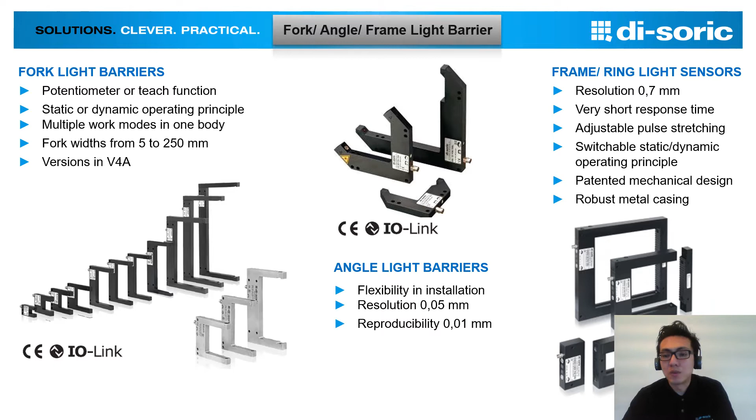An introduction on the sensor itself - we mentioned that one side is the emitter and the other side is the receiver. There is actually an arrow indication where you can see where the light path, the source, is coming from. Any target that comes between the fork will be able to trigger.

As mentioned, 050 will mean that this fork has a fork width opening of 50 mm, whereas if 070, we will have a fork width of 70 mm, and so on and so forth.

So for all these products, it's actually IO-Link capable as indicated. Each sensor comes in 4 different sensing modes, where the original factory default will be the standard mode, and then via IO-Link we can change it to high speed, high power, and also high resolution depending on your customer requirement.

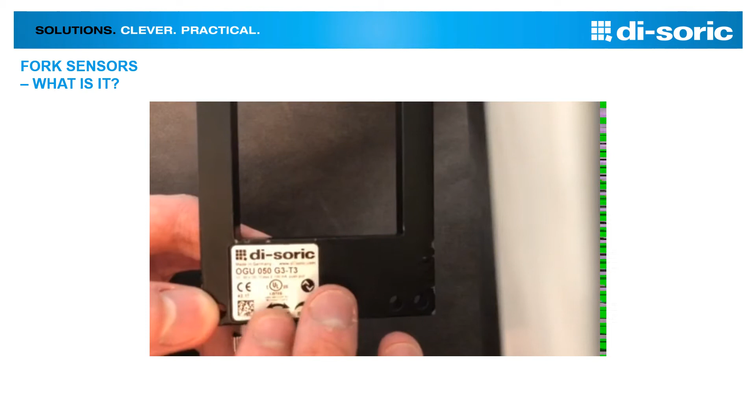So in the Asia context, where currently IO-Link is not very popular yet, this is the second generation of the fork sensor. Similarly with the first generation, the default potentiometer adjustment is still available, where you can change the setting using a screwdriver to either get NO, NC, and even the sensitivity adjustment.

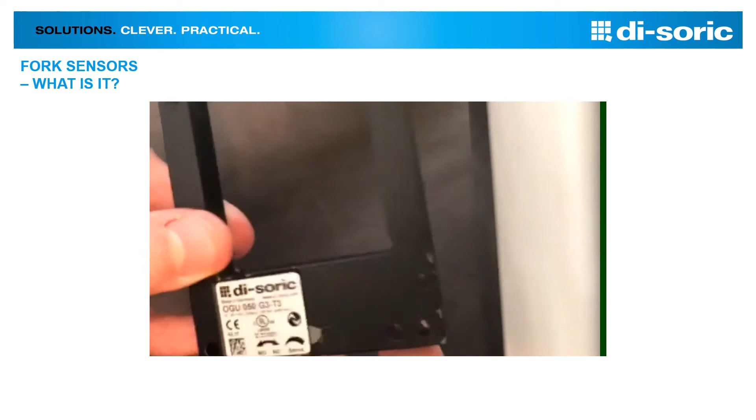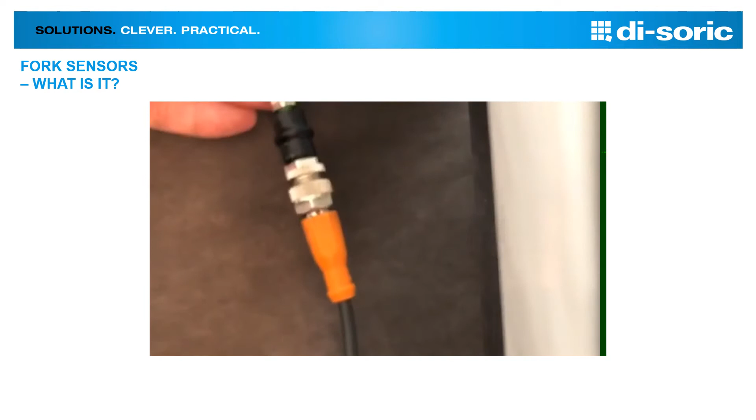So everything is integrated on the sensor itself. No alignment issue and no other additional wiring - just one particular cable, one singular housing, easy to apply, easy to operate.

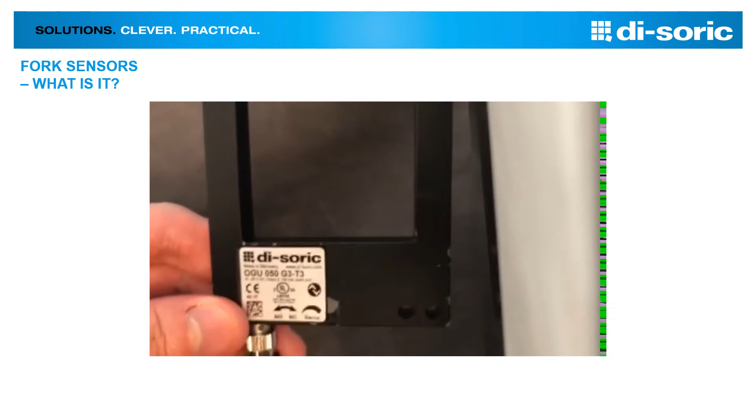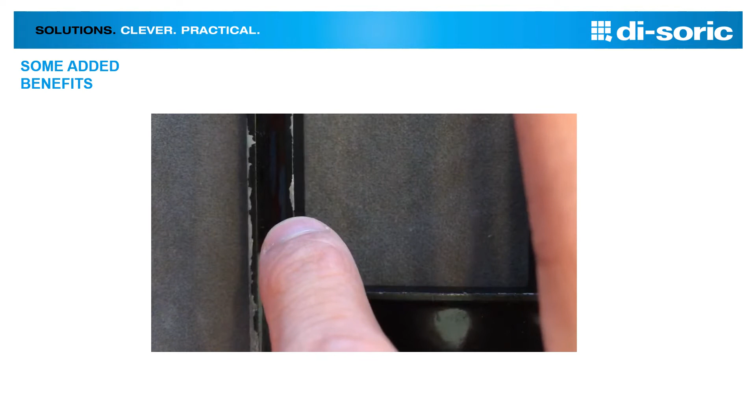An additional advantage of this sensor is, unlike other brands where the cover of the sensor is just a typical cover with gaps, in demanding environments there is intrusion of water vapor particles, and the sensor will die a lot quicker.

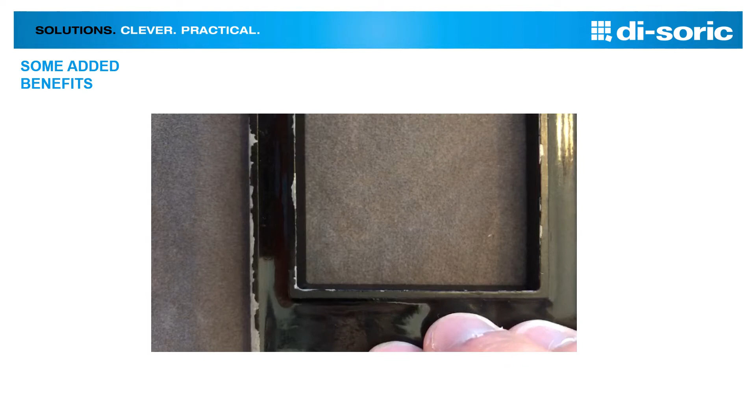In the di-soric case, you can actually see that our fork sensor is fully encapsulated, meaning you will not be able to find any gaps whereby any foreign particle is able to enter the sensor itself.

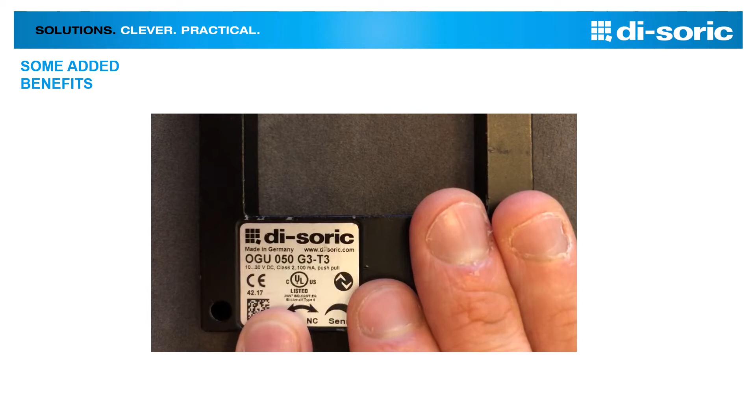With this design in place, the sensor has a very long lifespan, very reliable, very robust, which is why di-soric is confident enough to give a 5-year warranty for the fork and the Angle series.

In harsh and demanding working environments, where there might be a lot of sawdust or other dust particles, your regular photoelectric sensor will require a lot of cleaning. The fork sensor can come in a high-powered model, coupled with infrared optical lighting. With this configuration, the sensor is able to function with very high performance capability. Cleaning is brought to a minimum because of the penetrating power of the IR light itself, along with the sensor working under a high performance configuration.

Other special requirement applications might include high-speed monitoring, which the OGU 010 is able to reach, with a max speed of 14,000 Hz switching frequency. This speed is very fast compared to other products in the market. 14,000 Hertz is a very high value which is almost unmatched.

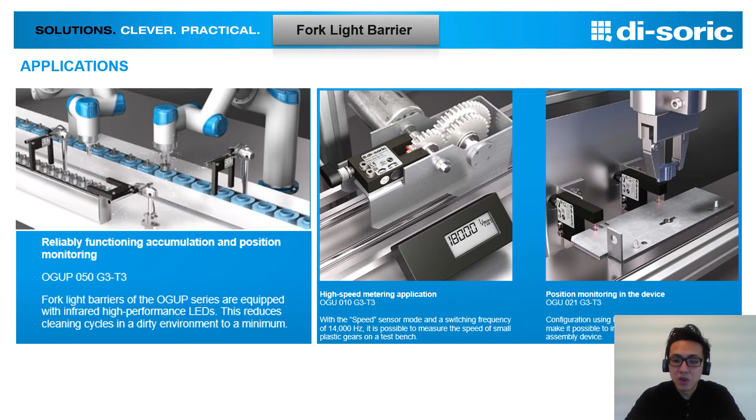In such requirements, we definitely have the right sensor for the job, and it's up to us to bring this knowledge to the customer themselves. Very high switching frequency, very high switching accuracy also. Depending on the requirement of the application, one singular model of the sensor can be configured differently, and used to address different situations and different working requirements.

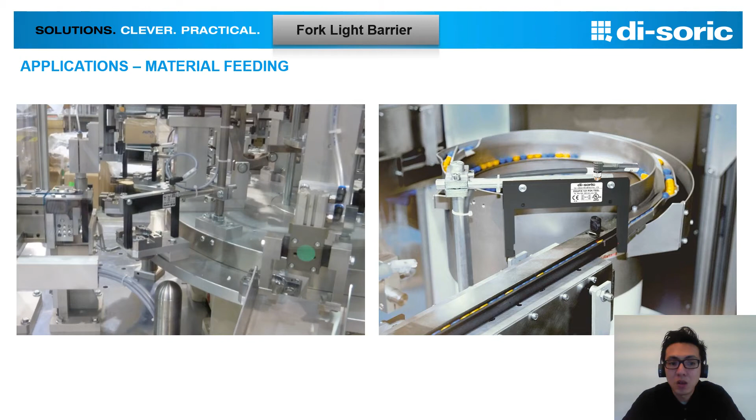Here you can see actual real installation of the fork sensor, showing in normal circumstances how it is being installed, how it's being mounted to the machine itself, and how the detection is carried out. In this case, we see a material feeding system whereby the fork sensor is set up in line with the material path to pick up the presence of material.

So what it can do is also perform the location of specific parts, depending on how you would mount the sensor.

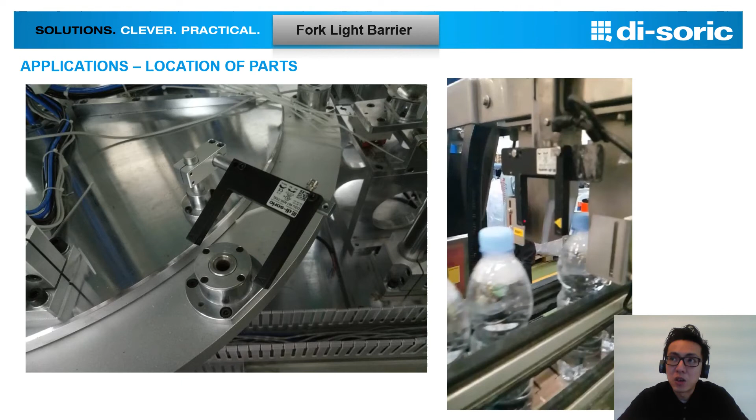Under such high speed, you can also see that the switching itself is very accurate. The fork sensor is definitely a very capable product, easy to understand, easy to install. Just that in the Asia context, most customers are used to using fiber optics for these applications, or just regular photoelectric sensors. However, the fork sensor does have a lot of advantages that I believe, once we introduce this product to the customer, might actually be very interesting and beneficial for them.

An example of where we will see the angle light barrier is in robotics applications where there are a lot of grippers for the gripping of materials. The angle light barrier can actually be installed parallel to the gripper itself so that it doesn't obstruct any material coming in or out. That is why we mentioned that this very unique design is not adopted by a lot of other brands, but is actually a very flexible, very innovative product that is definitely going to be very helpful in a lot of applications in the market.

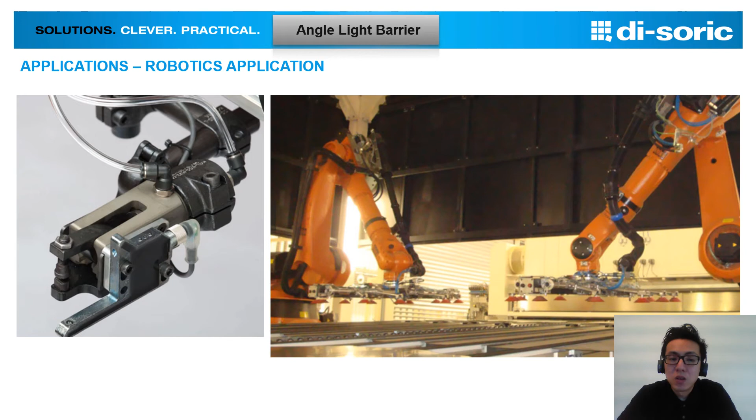Such products are very cleverly innovated and developed by di-soric. I really hope that we can do our best to bring all these products to your customer and see where we can put these sensors to good use.

Same thing due to its unique design: if there are any mounting difficulties or any concerns with installation, the angle might be a better choice than the fork itself.

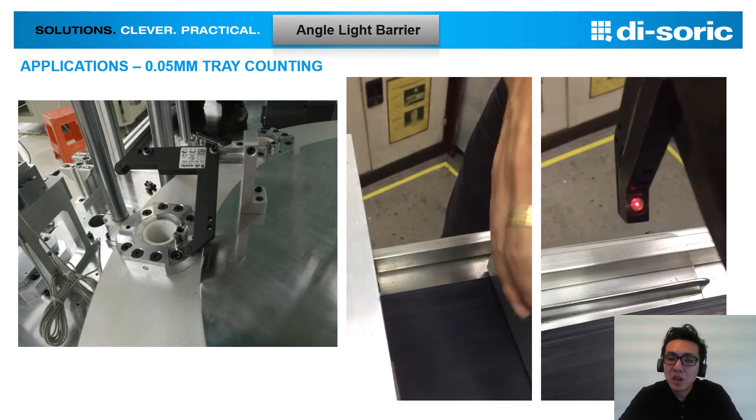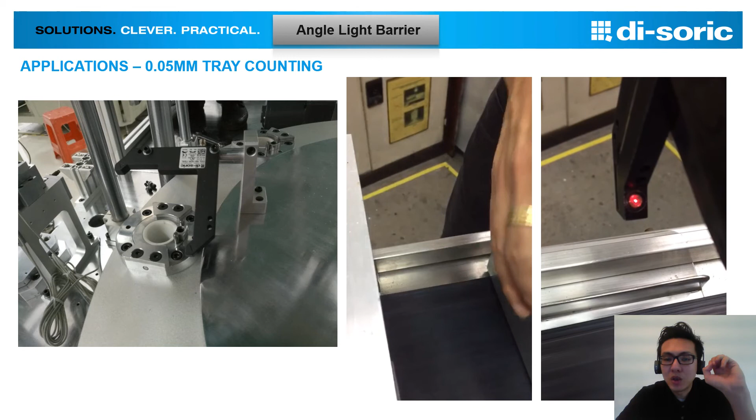Under normal circumstances, how are you going to position your regular through-beam sensor? You can do it the same as the angle, but it's going to be a hassle coming up with the brackets and doing the alignment, whereas the angle sensor itself comes in one singular housing, which you can easily install to your customer's preference, easy to apply and operate. Here we can see the very high detection capability and the accuracy that the sensor actually has.

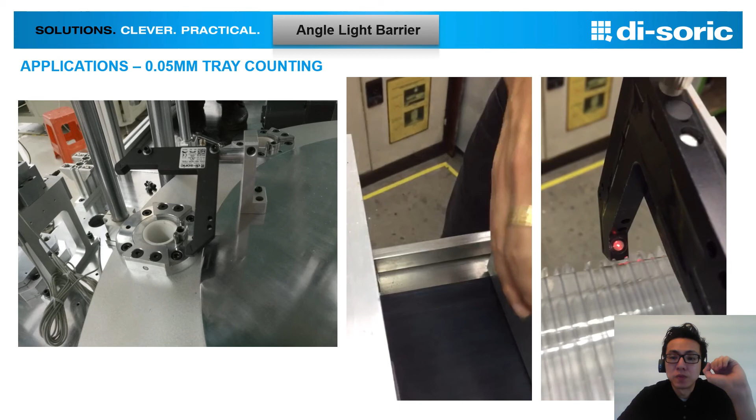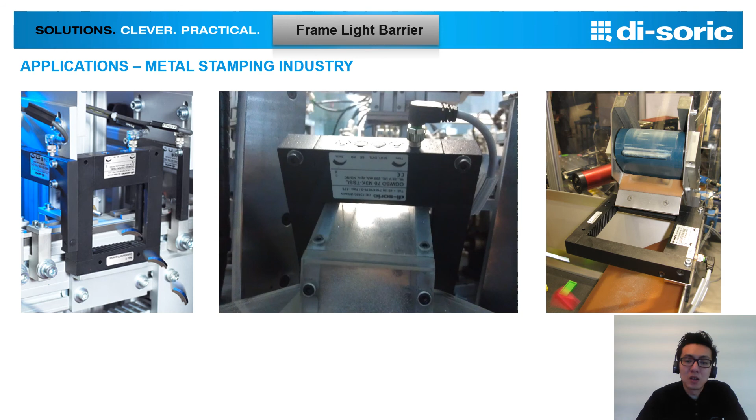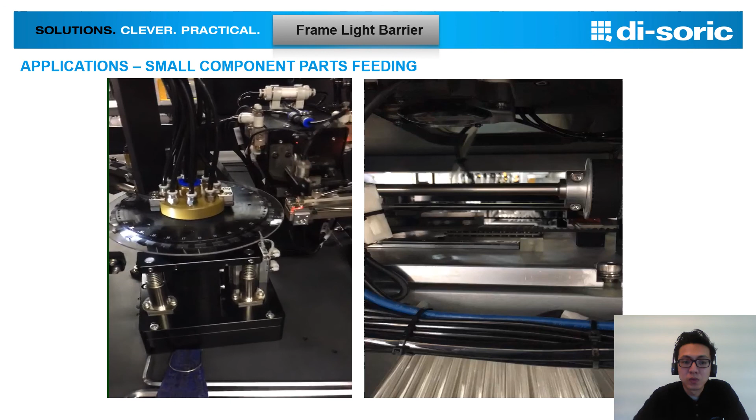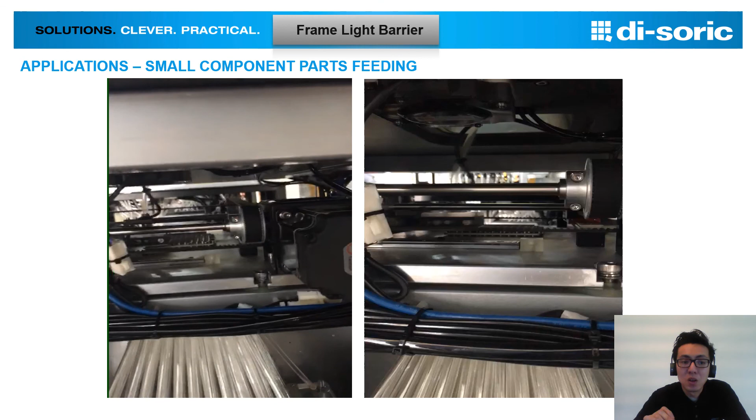This is an example of the high resolution model being used by a particular component manufacturer, where the component is down to a size of less than 1 by 1 millimeter. What the machine is doing is placing all these small components, which are fed through the tube and go down to the place of assembly. As you can see, the movement of the machine is very fast, indicating that the switching capability of the sensor itself is also very high.

In the other video, you can actually see the sensor turning on and off with the passing through of each component.